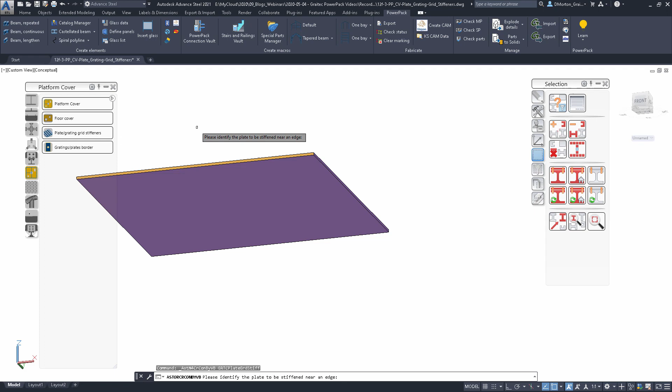All right, so we're going to start off here by going to the Graitec PowerPack connection vault. Left click on that and the tool palette will open up. Come down the categories along the side till we see platform cover, and in here we're going to select plate grating grid stiffeners. Left click on that and pick your plate or your grating. The edge that you initially select is important because that's where you'll be offsetting your plates from, and it also determines the direction of the main plates that come in, or the transverse stiffeners if you prefer.

Once the dialog opens up, we start in the properties section. It gives you a little bit of information about what the tool is - it's the plate grating grid stiffeners. We also have a section for library where you can save your settings, and about, which tells you a bit about the tool.

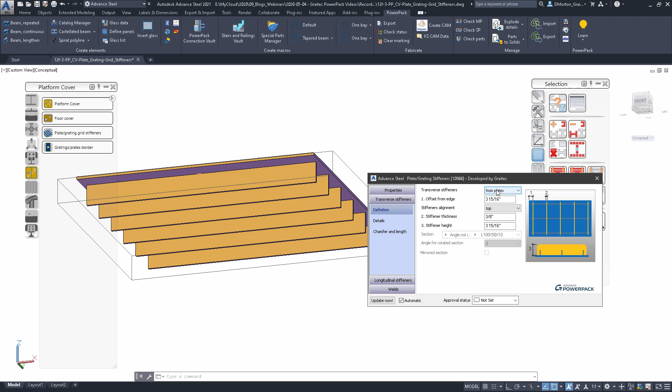If we go to transverse stiffeners, from here we can determine what we're using as far as the shapes are concerned - are they going to be plates or sections? And if you choose sections, you have the option to pick whatever section you want from down here, and the size.

You can offset from the edge whatever distance you want, and remember I said the edge is important that you initially select - it'll offset from your selected edge. So you can see I picked this edge here and it's pushing it back that way.

You can set your thickness for your stiffener, and if I type in a value here, you'll see it gets much thicker. So you can choose whatever value you want for your thickness and the height as well. You can see that they grow accordingly.

Under details, we can say we want these to be below or above. I'm looking at the bottom right now, but we could put them on the top if we wanted to.

We can determine the spacing based on distance and set our value in here, quantity, adjust the quantity, or a combination of the two. We can say we want 6 at, and we can change it to example 4 inches, and you can see it'll space them at 4 inches apart and still give you the 6 stiffeners requested.

So I'm just going to put it back to distance, and I'll set this a little larger, 8, and we have our stiffeners. For chamfer and length, we can do straight, convex, or concave.

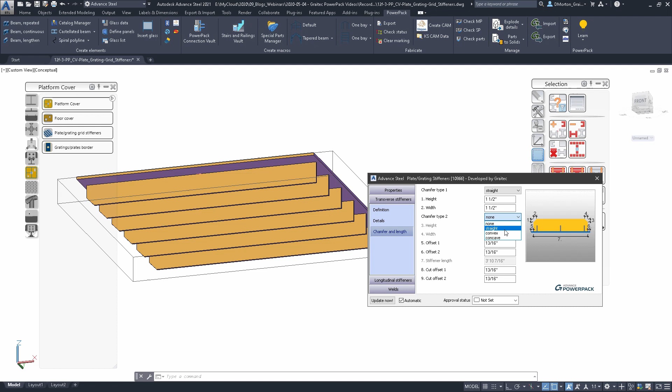So if I do straight here, I can come in and say what I want as far as the chamfer is concerned, and you can see it's adjusting the stiffeners all along one side. And if I come back to the other side here, I'll do the same thing, and it's adjusted along the other side.

We also have the option here for offset. So if we were to say I want to offset from the edge 5 inches, you'll see it pulls it in on the other side 5 inches, right? And you can do the same for the near side.

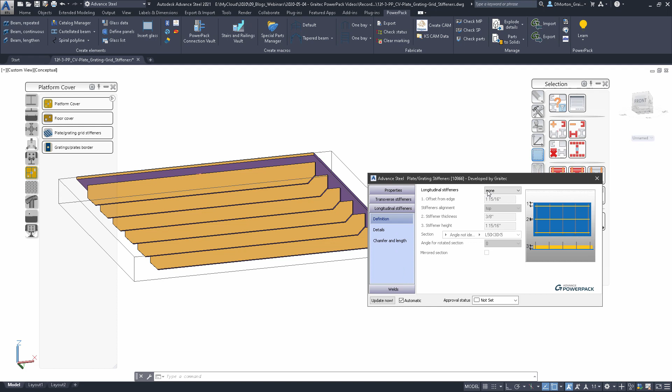Under longitudinal stiffeners, you have the option to add in additional longitudinal stiffeners from plates or from sections, and you can go and create these. Set how far from the edge you want them to be, and measured from the edge to the top of the plate, middle of the plate, or bottom of the plate where that first plate is concerned.

What is the thickness? What is the height? And so on. Under details, you have in here, do you want them to be divided or continuous? Now, with divided, you're going to get individual plates in between the initial transverse stiffeners. So I can have it divided or continuous.

If I were to come in here now, I could do a chamfer, same as before, exact same settings. I'll set both of them, so we'll make the height and width 1 this time, for both sides. And you can see the chamfer that is taking place.

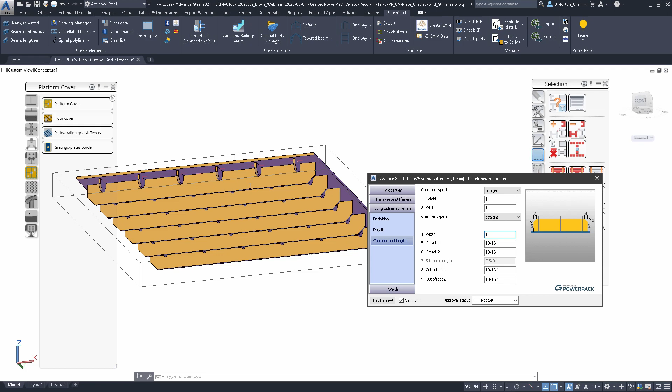But because these are divided, if I turn this a little, you'll see that every shape is getting that chamfer. They're each individual pieces and each one gets the chamfer on it that I've put in.

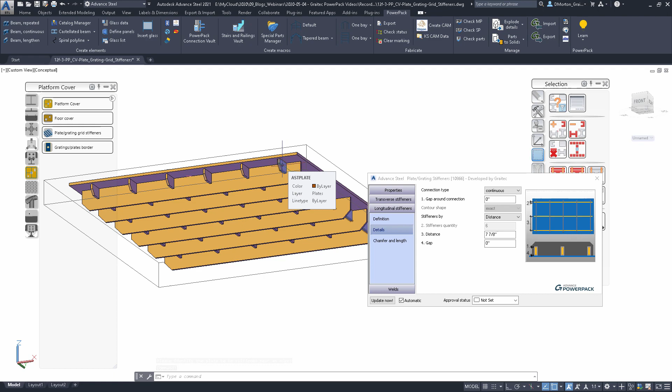If I put it as continuous, now this becomes one continuous plate, and if I turn it, you can see there's no chamfer on it, except at the ends. So you have that option as well.

Again, you can place the stiffeners by distance, quantity, or a combination of the two, just like before, and set that to whatever you want. It will adjust them.

Finally, for welds, you have in here for the transverse and for the longitudinal stiffeners - what is the weld size? What type of weld do you want to use? How is it placed in? Is it placed in the workshop or is it placed on site? And then you can determine in both directions for the plates going in each direction what type of weld size and locations you want them to be placed at.

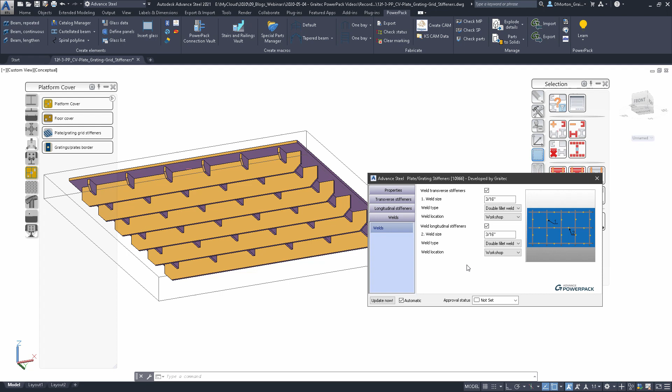And that is the plate grating grid stiffeners, and that is found in the Graitec PowerPack connection vault.